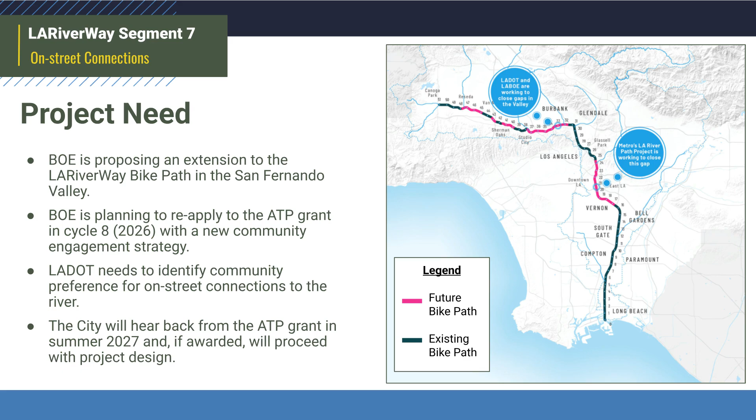To prepare the project for the grant application, LADOT needs to identify which on-street connections should be proposed in the project. Community preference is an important factor in shaping that decision. The city will hear back from the ATP grant process in summer 2027. If awarded, the project will proceed with design.

The yet-to-be-built sections of the LARiverWay in the San Fernando Valley are planned over several project segments. Segment 7, shown in blue, spans from Woodman Avenue to Coldwater Canyon Avenue. It will include a 1.2-mile section of dedicated bike path along the bank of the Los Angeles River. To help users connect to and from the river path, the project will include on-street bike lanes and pedestrian features. The project aims to connect to disadvantaged communities with new bicycle infrastructure and link them with the LARiverWay path system.

The Segment 7 project will connect to an existing LARiverWay path segment to the east that spans from Coldwater Canyon Avenue to Whitsett Avenue. This is shown in green on the map. Further east, shown in red, the LARiverWay Segment 8 project is currently in design and will be 3 miles long. Construction on LARiverWay Segment 8 could start as soon as 2029.

West of Segment 7 is the yet-to-be-completed Segment 6, shown in purple, between Hazeltine Avenue and Woodman Avenue, for which planning will be initiated in future years.

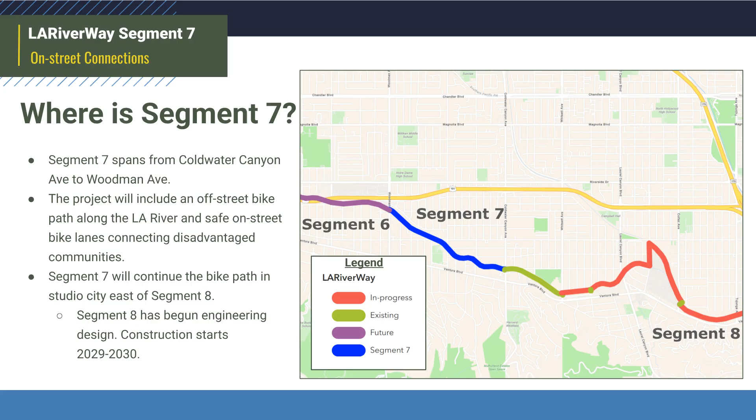The California Active Transportation Program, or ATP, funds large transformative bike and pedestrian projects. The ATP grant cycle opens every 2 years for project applications and is highly competitive. Winning applications from the 2024 ATP cycle scored 96 out of 100 or above. ATP guidelines favor projects serving disadvantaged communities.

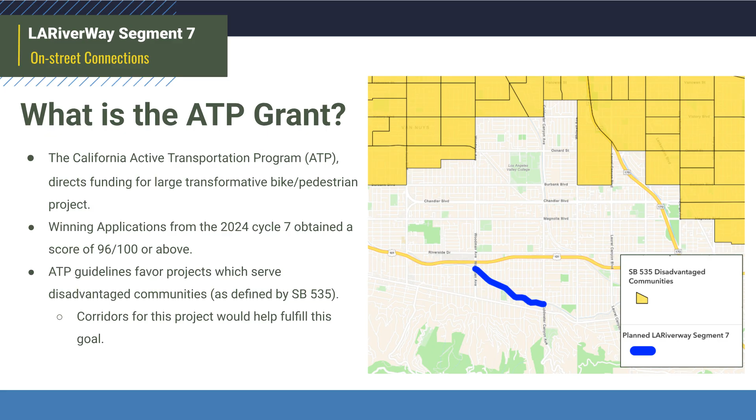State-designated disadvantaged communities are shown on this map in yellow. 2 LARiverWay projects have previously won ATP funding in prior grant cycles: LARiverWay Segments 1 and 2, which were combined into one project, and LARiverWay Segment 8.

LARiverWay Segment 7 is located in the San Fernando Valley of Los Angeles, in the area of the neighborhoods of Sherman Oaks, Studio City, and Valley Glen.

In addition to building the 1.2-mile Class 1 bike path along the LA River between Woodman Avenue and Coldwater Canyon Avenue, the proposed project will also include one on-street bicycle infrastructure connection connecting to and from the north. 3 possible corridor options are Hazeltine Avenue, Fulton Avenue, and Ethel Avenue.

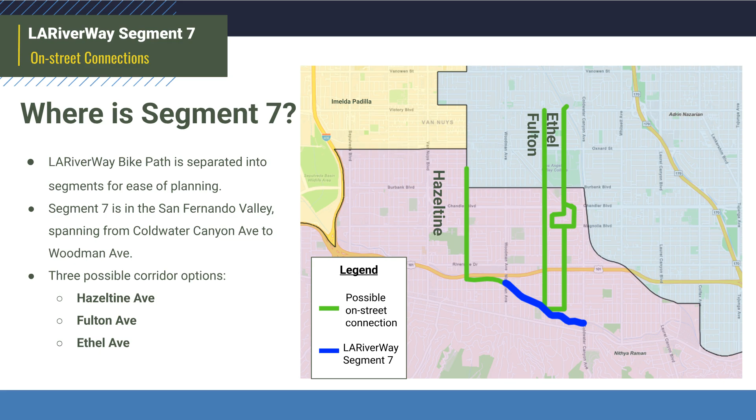LADOT and BOE are evaluating the corridor options and will strongly consider input from community members on their preferences and needs to help finalize the on-street corridor project scope. 3 other corridors have already been considered and screened out: Woodman Avenue, Sunnyslope Avenue, and Coldwater Canyon Avenue.

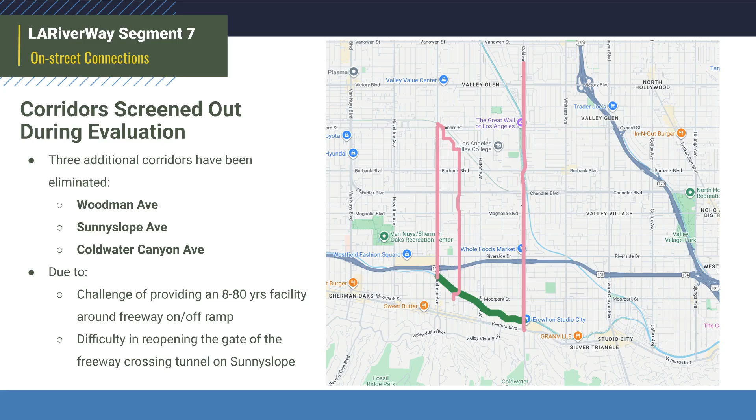These routes were removed from consideration because they each present serious obstacles to providing a project that is comfortable and safe to use by people of many ages and abilities. In particular, freeway on/off ramps and other existing infrastructure made these routes less suitable choices than the 3 that are still under consideration. Option 1 for the on-street bicycle lane is on Hazeltine Avenue.

This route offers about 2 miles of protected bike lanes between the intersection of Woodman and Valleyheart to Hatteras Street. Hazeltine is a 35-mile-per-hour arterial road which would need protected bike lanes in order to provide safe infrastructure for cyclists to ride in.

It connects to schools, parks, and commercial destinations, and could reach the G-Line bikeway if extended. The Hazeltine Avenue route connects directly to the Van Nuys Sherman Oaks Recreation Center. This route connects to the LA River Way at Woodman Avenue.

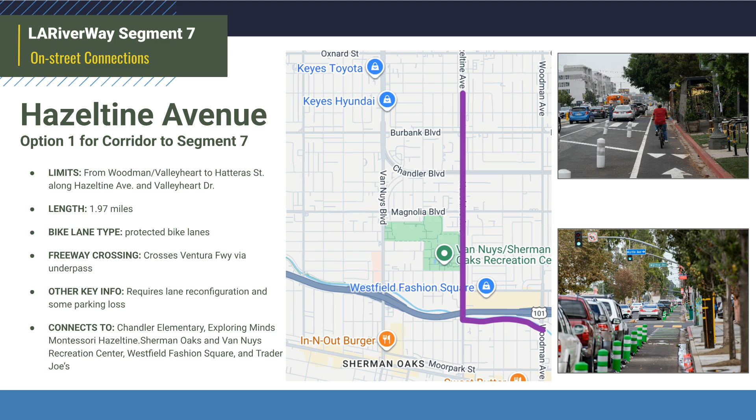Option 2, along Fulton Avenue, would also include about 2 miles of bicycle infrastructure. In this option, protected bike lanes could be built along most of the route, but a section of Fulton that is too narrow for protected bike lanes would have shared bike/car lanes from Valleyheart Drive to Victory Boulevard.

The Fulton Avenue route crosses the Ventura Freeway via an underpass and connects to LA Valley College and the G-Line Bikeway. It connects to the LA River Way, where Fulton Avenue meets the LA River.

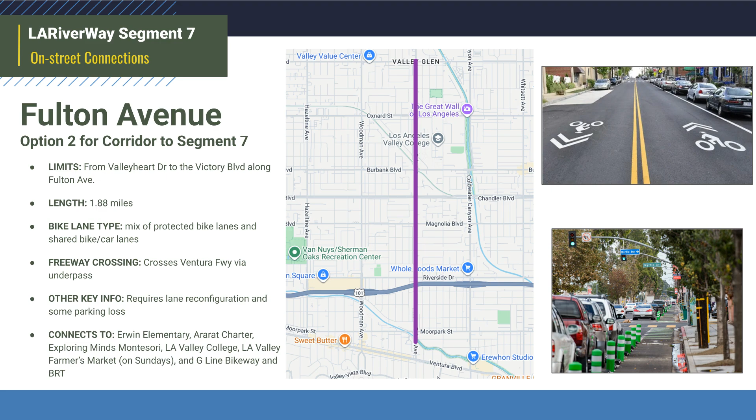The third option is a route using Ethel Avenue that has 2 different versions. Because Ethel is not continuous along the route, 2 choices for a short detour are available. Option 3.1 is the first detour option for Ethel Avenue via Longridge Avenue.

This 1.8-mile neighborhood greenway connects to schools, LA Valley College, and the G-Line Bikeway, crossing the freeway via an existing tunnel. Ethel Avenue is a slower, 25-mile-per-hour neighborhood street, which could provide a safe route for cyclists with fewer changes to the street when compared to Hazeltine and Fulton.

Neighborhood greenways are a type of bike route that do not rely on traditional bike lanes. Instead, bike riders share the road with cars. Neighborhood greenways have infrastructure meant to slow down cars and divert automobile traffic, including but not limited to speed bumps, stop signs, roundabouts, chicanes, and crossing improvements at intersections with major roads.

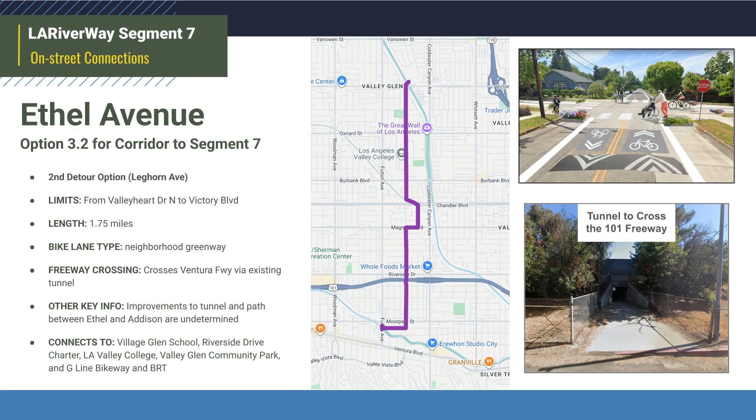Option 3.2 is the second detour option for Ethel Avenue via Leghorn Avenue. This 1.75-mile neighborhood greenway also connects to local schools, LA Valley College, and the G-Line Bikeway using the existing tunnel.

As a summary, the 3 main options are as follows. Option 1, a project on Hazeltine Avenue with protected bike lanes. Option 2, a project on Fulton Avenue with a mix of protected bike lanes and shared bike and car lanes. Or Option 3, a neighborhood greenway project on Ethel Avenue.

To best conserve limited resources, LADOT and BOE cannot fully design all 3 corridor options before submitting the ATP grant application. An on-street route will be selected based on community input, an assessment of feasibility, and the consideration of field conditions like pavement conditions, and the overall flow of people walking, rolling, biking, and driving.

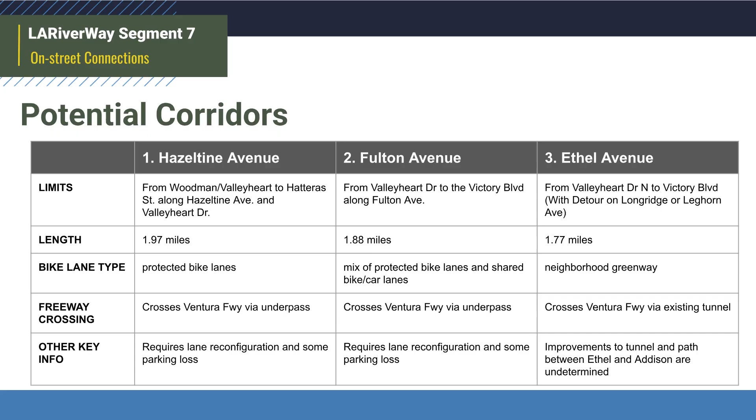Community preference is the main focus at this stage. Community engagement is ongoing with the goal of collecting feedback through the survey on the project's website. LADOT and BOE staff are presenting to neighborhood councils and community groups and have prepared this recorded presentation, a fact sheet, and a project website.